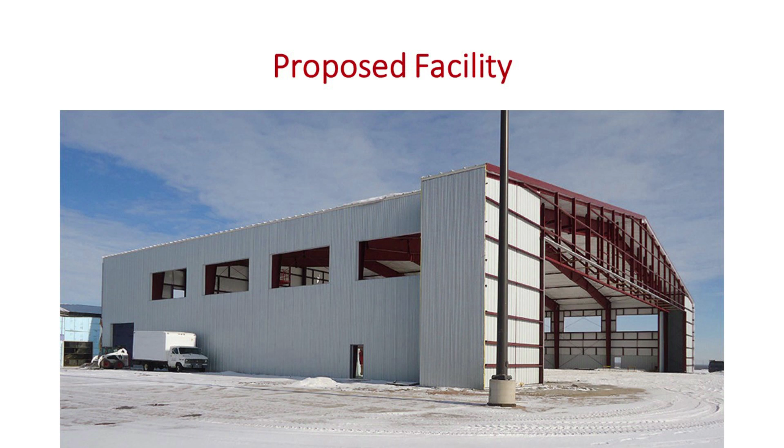The proposed facility was a hangar to be used for helicopters. The picture on the screen roughly indicates the size and shape of the proposed facility and may not be the actual one. A hangar of size 35 meter by 50 meter by 8 meter high had to be constructed with a bay spacing of 5 meter. The steel truss of 35 meter span was to be rested on RCC column of 8 meter height.

The structural drawing depicted the elevation of the truss and the support details. After casting the RCC column, the steel truss was to be lifted and placed on the column. The contractor had outsourced the fabrication work to a subcontractor. The subcontractor was tasked to place the truss on the column by the contractor. The details of the connections were overlooked. The protruding reinforcement of the RCC column was used for anchoring the truss by the subcontractor.

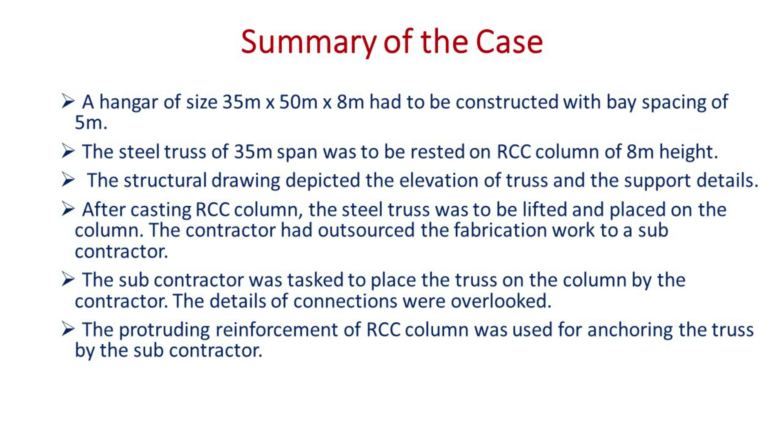After erecting 5 trusses, the rest of the work was planned for the next day. 3 purlins were fixed on the truss by tack weld. Next day at around 9 am, the truss collapsed, killing 3 workers at the site. The client blamed the contractor for the accident and the contractor blamed design deficiencies for the mishap. The design was vetted from a premier technological institute, and the client approached the institute to find the real cause of the accident. The work got delayed for 3 years due to the accident.

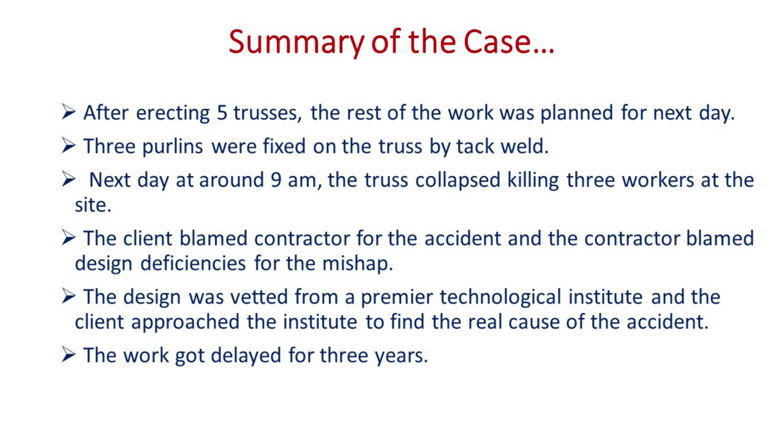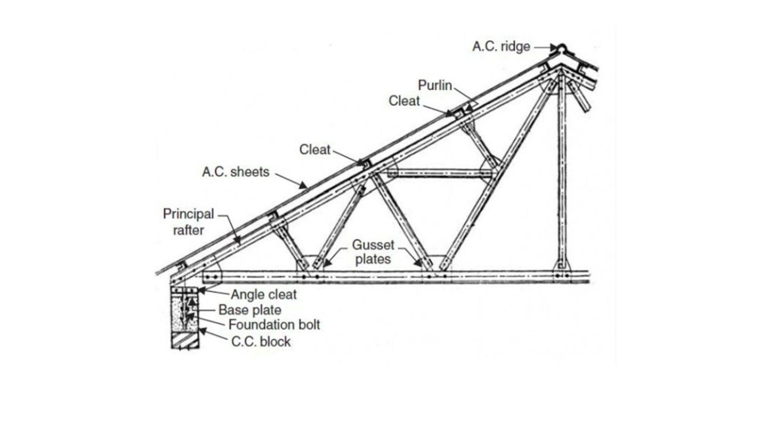Having understood the background, now we will look into the scientific reasons behind this accident and what all lapses led to this mishap. The figure shows the typical cross section of a truss with connection details. The support details include the foundation bolts embedded in reinforced cement concrete and the base plate at the top of the RCC column. The axial forces are supposed to be transferred through the base plate to the support of the truss, and that is achieved by high-strength friction grip bolts.

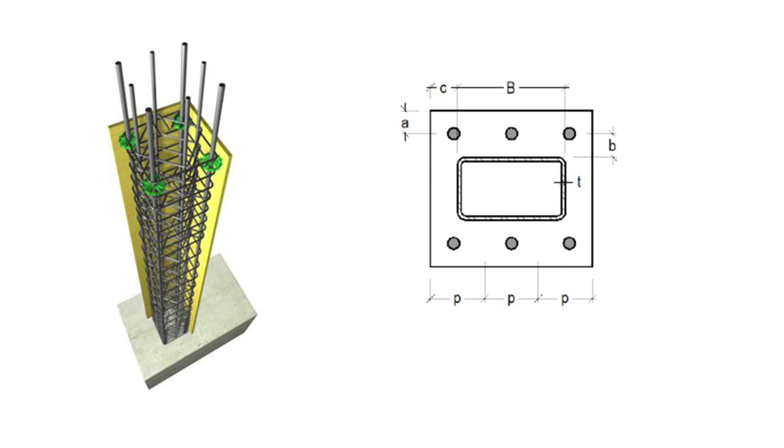In our case, the contractor did not purchase the J-hooks or anchor bolts which were supposed to be embedded in the column, or he forgot to do it before casting the top of the column. When it was time to lift the truss using a crane, it was too late, and the fabricator found a quick solution by welding the base plate with the reinforcement of the column after inserting it through the holes provided in the base plate.

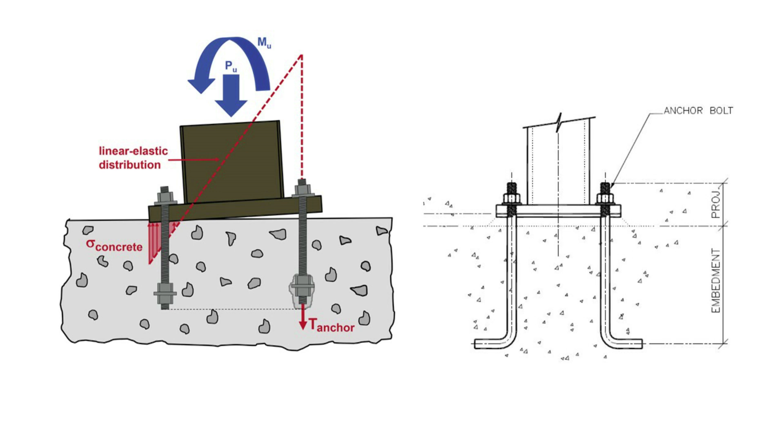During high wind, the truss sways and exerts axial forces as well as moment on the base plates. The very purpose of the anchor bolt is to resist these forces by bond in concrete and prevent any uprooting of the base plate. The welded-on reinforcement neither provided enough bond strength nor any axial force resisting capability. Srinagar is an area where the wind velocity is considerable, and in an open area the effect was even more severe. The shown picture depicts the ideal arrangement of an anchor bolt and base plate. This should have been procured, fabricated and embedded before casting the top of the column.

As construction professionals, there are important takeaways for all of us. Safety in construction is closely related to construction sequence. Erection loads are significant in steel structures as wind plays an important role during construction. Construction sequencing has to be designed on the design table. Close supervision during critical activities is essential, and access to supervision has to be designed during planning.

Enough lateral stability has to be ensured by purlins and wind bracing. In our case, only 3 purlins were tack welded, which was insufficient to resist the lateral forces. In total, the cumulative lapses invited the disaster. There is no shortcut to safety. It has to be well designed.

I know that the real pictures of the accident site would have helped to better understand the case, but unfortunately, I can't share them as of now due to protocol issues.